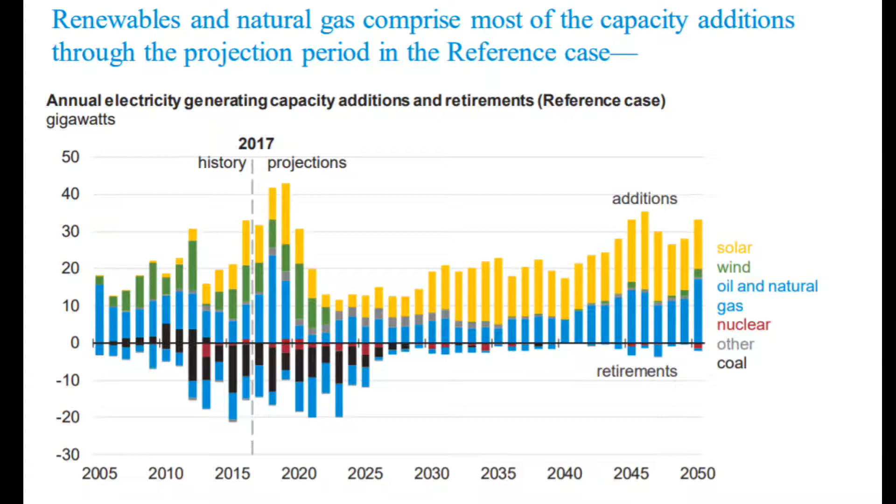Another reason why I love solar is cost. In 9 years, we've seen an 80% decrease in cost per watt, down to about an average of 30 cents per watt. It's really encouraging that the new installed capacity on our grid here in the States has been mostly renewable since 2014, as well as globally. So the trend is clear. While the shift to renewable energy won't happen overnight, the shift itself is happening.

So here we can see we're going to design a solar system for a commercial building. For example purposes, we'll base our solar system off of this building right here. We're going to try to maximize the amount of solar placed on the building. So I'm going to walk you through a process of designing a solar system for a building like that while taking into account what the stakeholders want and what their interests are.

Do they want the RECs, the renewable energy credits? Do they want to save as much money as possible? It all depends on a case-by-case situation, but that's why it's important to really look and see and take the blinders off of the technology and realize, okay, what are the economical, political, societal aspects of putting this solution together and coming to the best solution that makes all the stakeholders involved happy with the outcome.

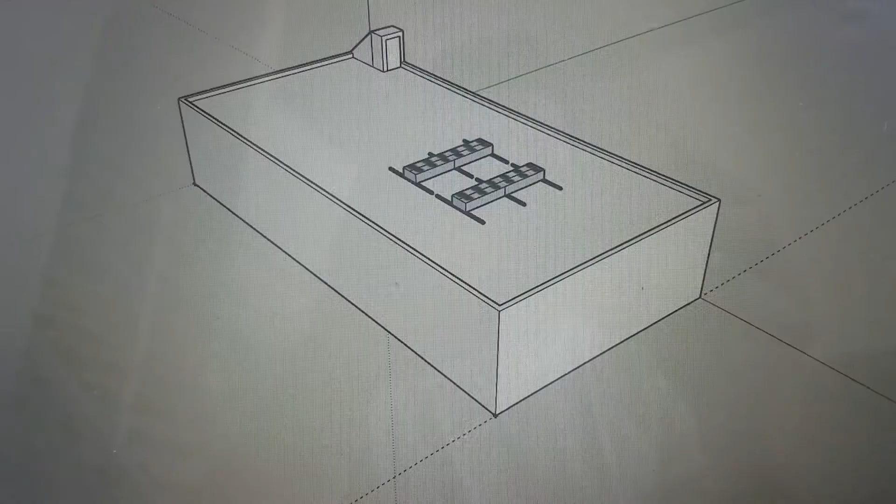So, moving right into it, we will first design our building here. So we'll first start out with a 50 by 100 design. I ended up making it a little bigger because I thought I would scale this building that's right next door to my apartment with some existing HVAC systems on board.

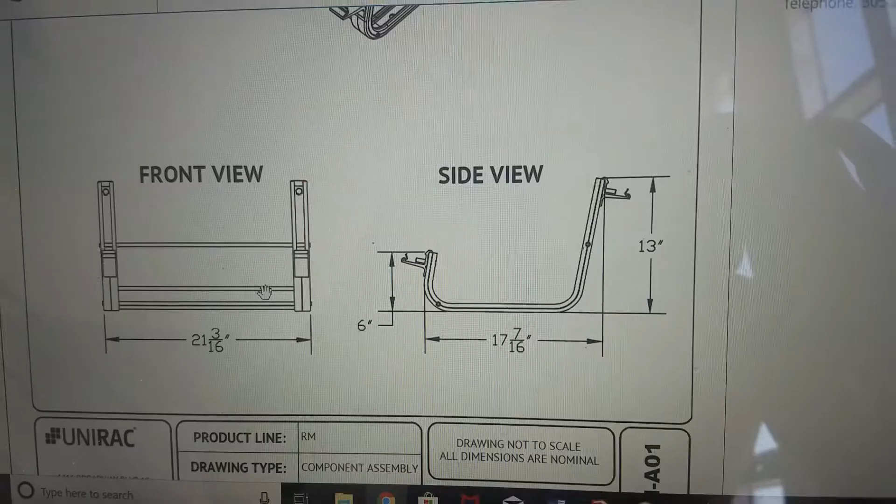Now, for the sake of this example, we're going to use 77 inches by 33 inches by 1 inch deep panels that are approximately 225 watts per panel. And we are going to place those on Unirac RM10 mounts. These mounts allow for a 10-degree tilt, 19 inches between the panel spacing. Designing this racking system exactly as it is in the spec sheet shown here, this will allow us to mimic exactly to scale how much solar we can fit on a building such as the one we talked about before.

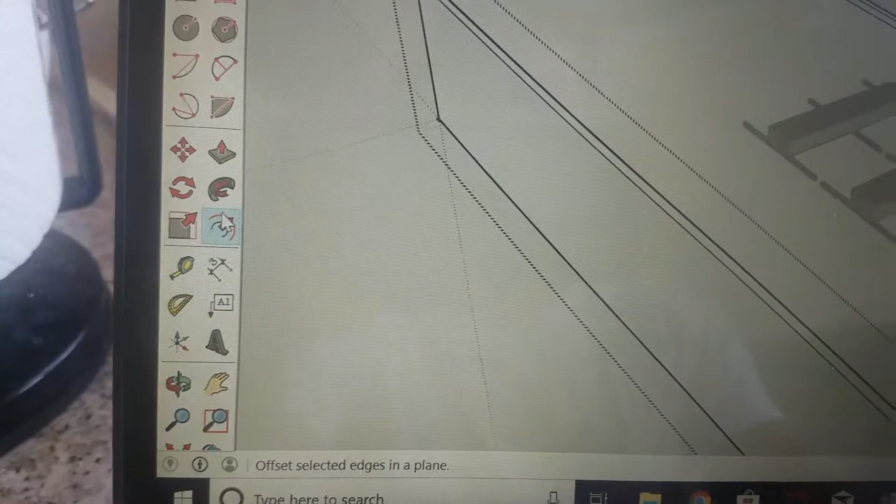So first, we want to set out our boundaries by placing everything on the roof that we know is going to be an obstacle. Existing HVAC, pipes, vents, exits, as well as we need walking spaces to service these HVAC systems. So once the HVAC is in there, the heating and AC, we need to have a 4-foot boundary around each of those for servicing, as well as a 4-foot wide pathway to get to the serviceable parts. And we also need a 4-foot boundary around the perimeter of the structure. This will allow us to walk around, also for fire safety in case someone needs to get up and walk around the site. Once this is in place and we have the mount and solar panel constructed, we can start laying them out.

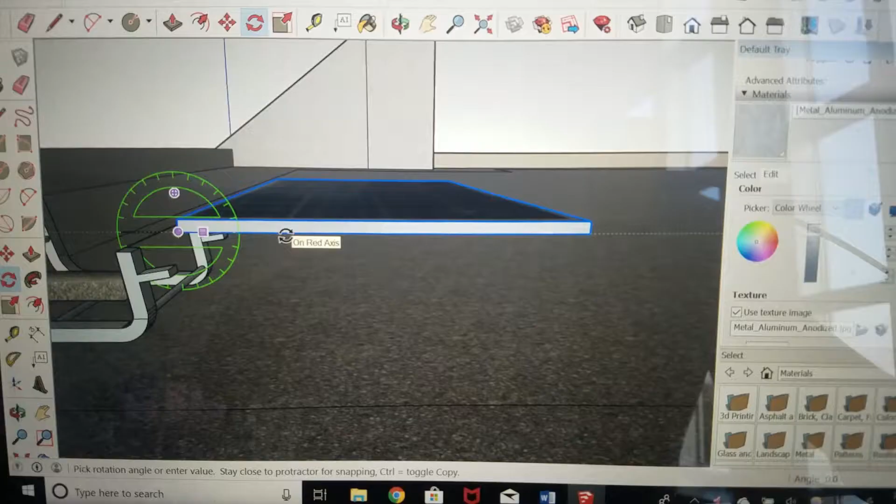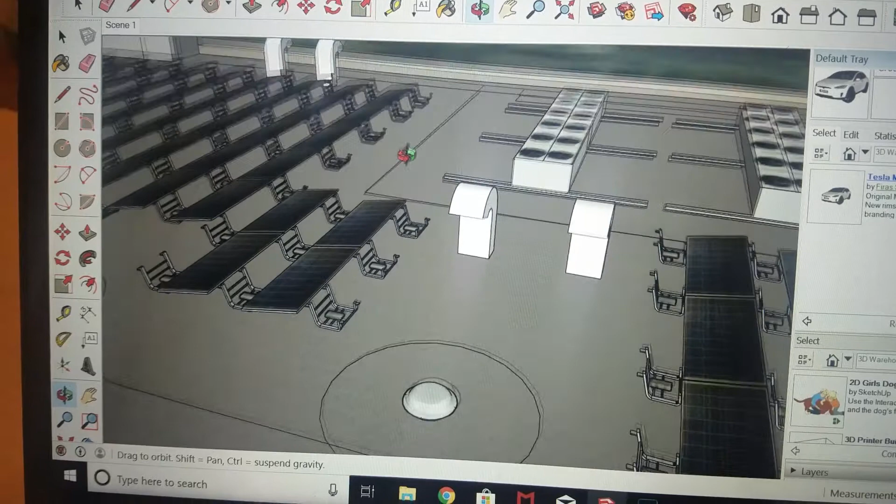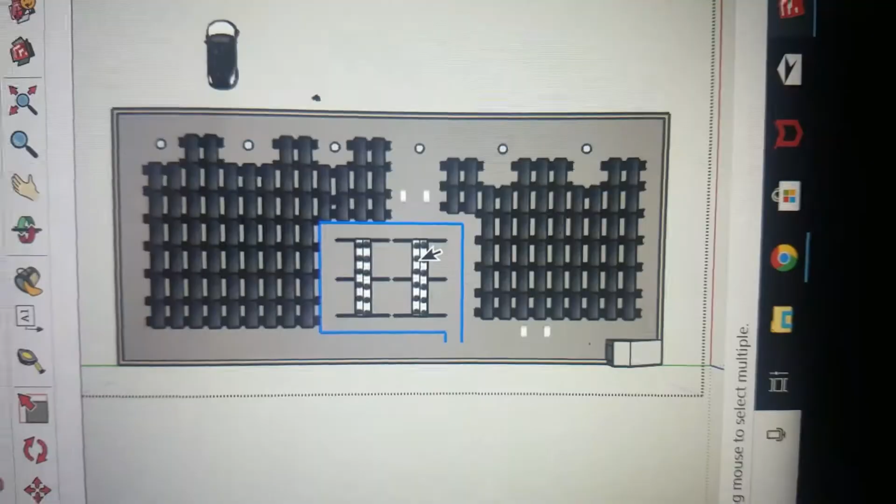So again, depending on what the client wants, they'll choose different mounts, which ones can fit more. Some would suit better for maximum production per panel. Some would be better suited for just fitting as many panels as possible on the site. So we're just filling in more panels now, keeping in mind those boundaries that we created earlier. And you want to make sure the panels remain in pretty large clusters. Sometimes with weird angles and weird things on the roof, you can fit a couple more if you shift them around and offset them. However, you want to make sure they're in large clusters for things like weather and they'll be held down well to the roof.

Another thing to keep in mind is that all these panels are angled south facing, that way they can capture more sun because we are in the northern hemisphere. So there we go guys, adding in some windows and some other scenery to give it a little more lively look. Hope our client will like this design.

So ladies and gentlemen, there you have it. Why do I love solar? The approach to going solar and an example of designing a solar system for a commercial site. I love the advantage it can provide to residential, commercial, and utility scale customers. I think it's really exciting and I'm looking forward to helping place more solar, more storage, and more sustainable energy and transportation in general on this planet.

Maybe this will encourage you or your business to invest in solar or maybe get into a solar ETF or fund. This technology is growing so fast, I just wanted to get more information out on the topic. I really am passionate about it.